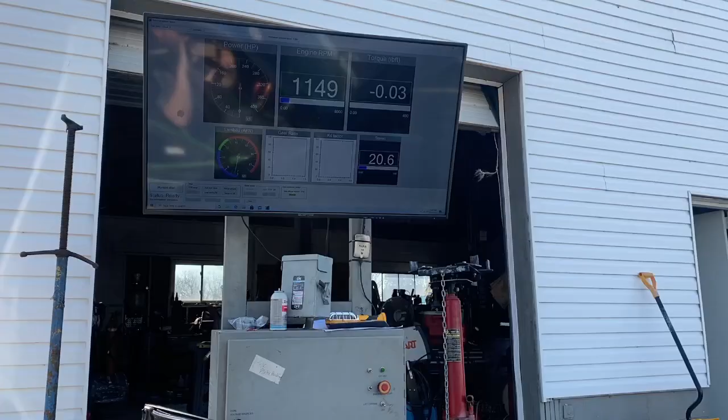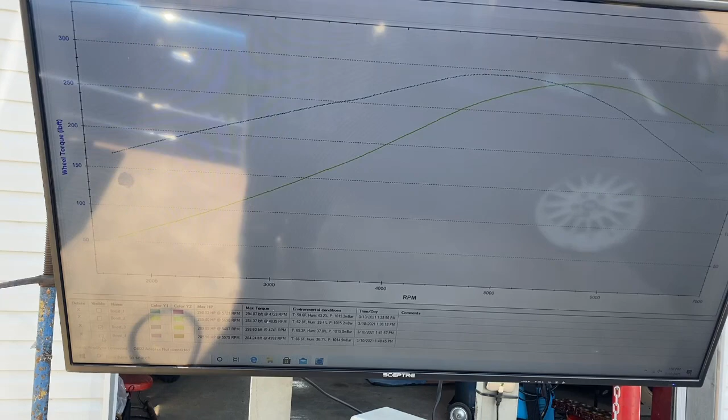Seven pounds of boost, keeping it rich, keeping the timing safe. She's making 289 horsepower and 293 foot-pounds. I'm gonna work on the fueling a little more, get that dialed, throw a tiny bit of timing at it, see how much it picks up, see where we're at. Honestly though, we're probably pretty close.

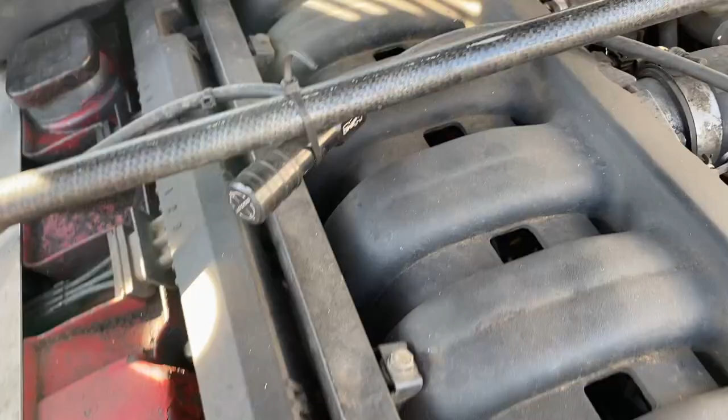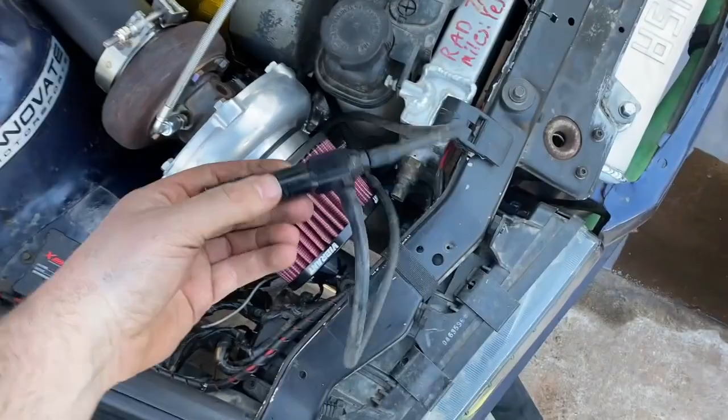I'm gonna pull the boost controller off of Old Reliable here. That way I can turn this one up in increments of a couple pounds up to 14, just so I know that if it does get turned up in the future, we're gonna be safe. So my boost controller is temporarily installed on this. I'm gonna go make a couple passes, work my way up, probably hit 10 pounds and then 14 pounds. We'll see what she does.

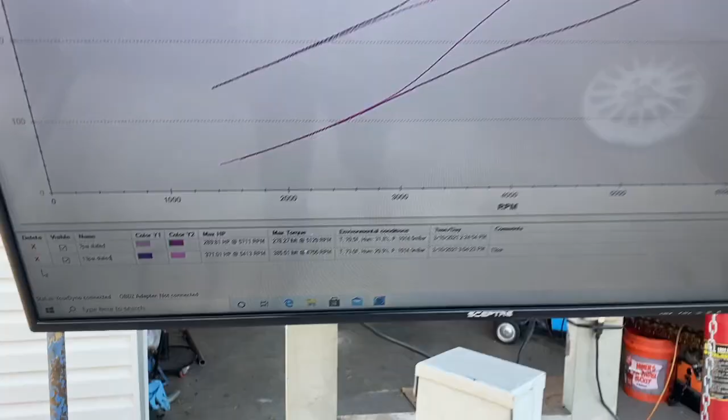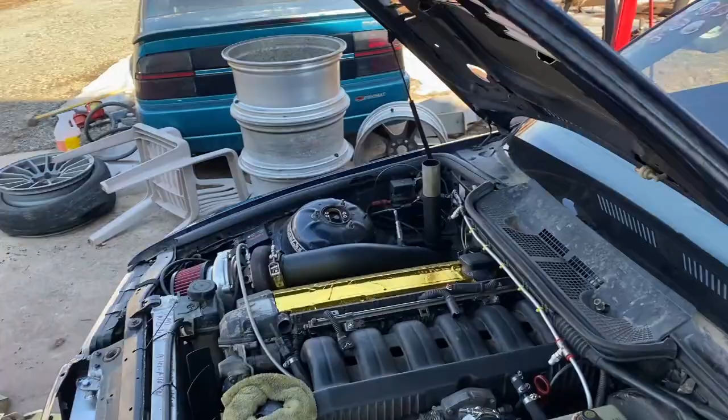Turned her up to 13 pounds, made 371, 385. I'm gonna ease off right there. The rings aren't gapped. She's all stock lower end on pump gas, so that'll be enough for drifting. It's got nice and conservative timing. He's got some 11-pound springs for it, for competitions and stuff, so I think that'll work well.

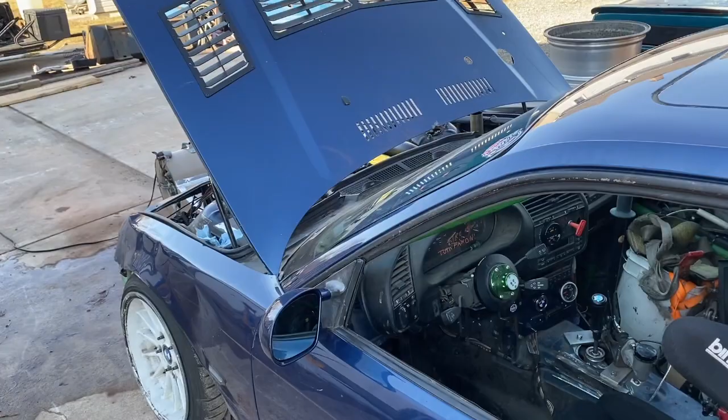I got a little more drivability to do on this car, and then it's coming off the dyno and going back home. Car's off the dyno.

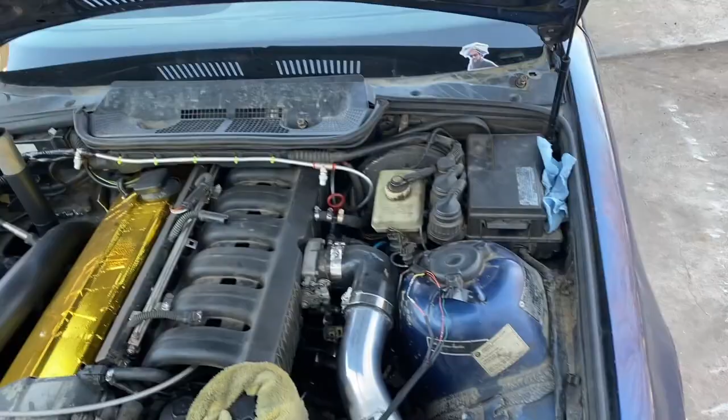Just gonna wrap up wiring the MAF, get all my shrink wrap on that and finished up. Okay, mass airflow sensor's all wired up, looks nice and factory. I ended up going with a 2200 ohm resistor. MAF voltage, 370 wheel horsepower, is about 4.3, 4.4, so there's plenty of overhead here. I'd say it'll probably be good to a little over 400 without having to rescale the MAF.

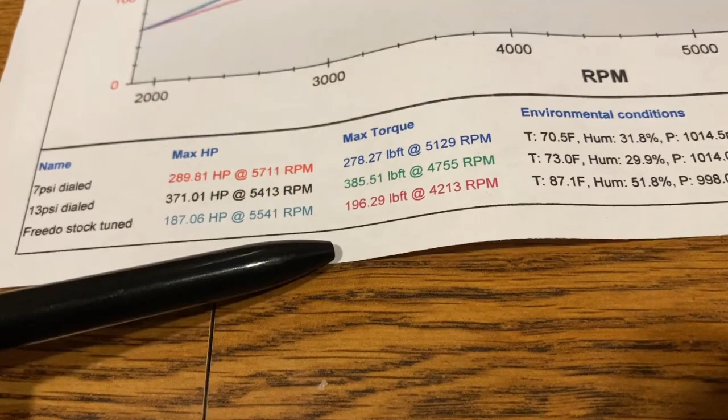So the results are in. I've overlaid stock power, 7-pound power, 13-pound power. Stock, this car made 187 horsepower on this dyno, 196 foot-pounds of torque. It's one of the healthier M52 2.8s I've had on there. At 7 pounds, it picked up over 100 horsepower, 102 horsepower and 80 foot-pounds of torque or so.

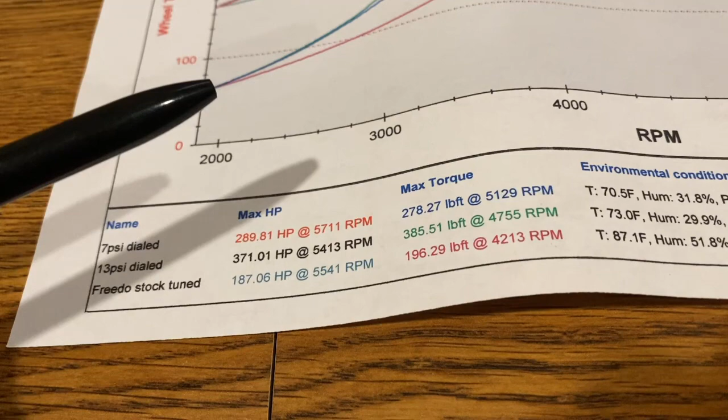Add another 6 pounds on that, we picked up about 90 more horsepower. Torque curve looks nice. Like I said, we carry over 250 foot-pounds for 3,000 RPMs. Should be a good drift car setup. So let's hope it holds together.

Just throwing on some crappy tires here for the post-maintenance operability testing.

Smoked a set of tires off it, first, second, third, fourth gear. She's still idling like stock, still hitting on all six, so I guess the tune can't be that bad.

And it's ready to get the crap beat out of it at the track. All right, guys, that wraps up this series of tuning an E36 turbo. The car runs pretty good. It's headed home to its owner, and I'm sure I'll see it at the track.